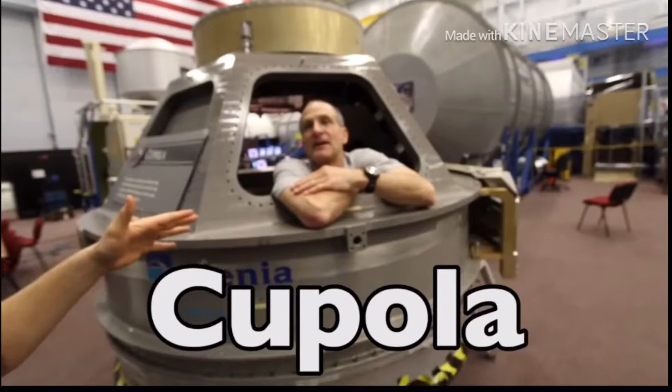Now, a lot of the pictures you see from the International Space Station come from the cupola on the inside here, right? So the cupola is on node 3, is that correct? Node 3. All right, so this is astronaut Don Pettit. You may know this guy. You've done all the city tracking. Yeah, I've done a lot of cities at night, and then the nighttime aurora and time-lapse sequences of Earth. Many of those that you see have been done in this module when I was at the helm of the camera.

He's the junk. Let me just say it that way. You're the junk when it comes to space photography, right? Can you say that? Say I'm the junk? No, I can't say that because I get too embarrassed. I'm gonna meet you on the other side, okay?

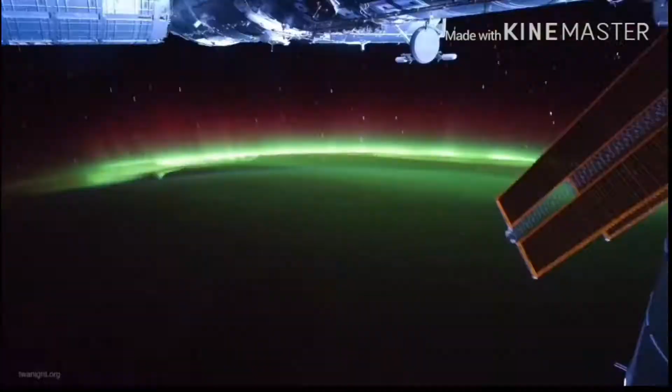So, seriously, he's the junk. Like all the really cool aurora stuff, Don's the guy that took it. Now this is a cover. Okay. So we call it a shutter, and it protects the windows from micrometeorites. The shutters are closed, the windows are protected, and it also thermally insulates the windows from the radiation environment of space. So can you shut these things from the outside? No, you can open and close them from the inside.

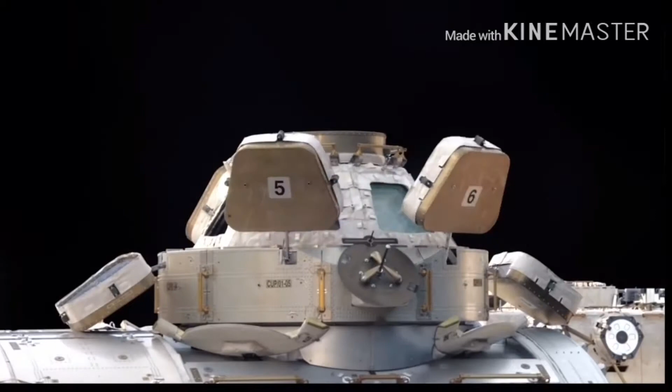Oh, okay, wait. On the inside, you're throwing a lever or something. Yeah, you're turning a knob. And it opens on the outside. On the outside. How do you do that and maintain a pressure seal between them? O-ring type seals, with a rotating shaft. All our hatch seals are O-ring type seals. Yeah, but how? My brain's up here. Let's go inside. We can see it. Watch your head. So you have a whole series of O-rings in here, and a shaft that you rotate.

So on the space station, how many of these would you have? 7, because we have 7 windows. What happens if you get a leak on that? Then you have a leak. You just have a leak, and you lose air. You would probably seal the whole cupola off, and there's probably a plan, I don't know off the top of my head, for replacing the mechanism.

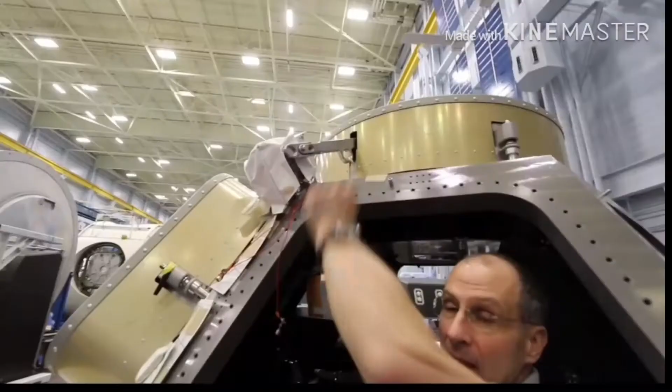Might require a spacewalk. So my question is, how can you operate a lid on the outside of the space station by manipulating something mechanical on the inside without losing air pressure? It's called real good engineering. Okay, you heard Don Pettit. He said it takes a really good engineer to design this sort of thing. I'm told the guy quit working on the space program and now owns his own motorcycle parts business.

Is Charlie here? Is he upstairs? You're doing an interview, right? I'm doing the interview. What is the name of this place? Pitbull Products. Are you Charlie? Yeah. Hey, I'm Destin.

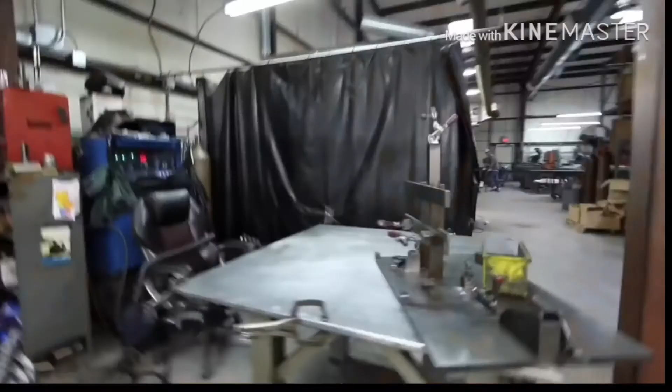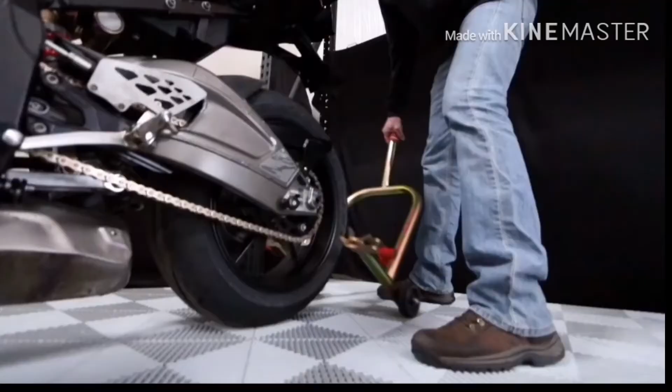This guy is Charlie Van Valkenburg. He went to Auburn University as an industrial engineer, and he's got well over a dozen patents. 20 years ago, he was the lead engineer over the cupola shutter design, but after the project finished, he went and built his own business. Now he's building this, a special stand that uses leverage to pick up a motorcycle so people can work on it. He's so humble that even the people that work with him had no idea what he did for the space station.

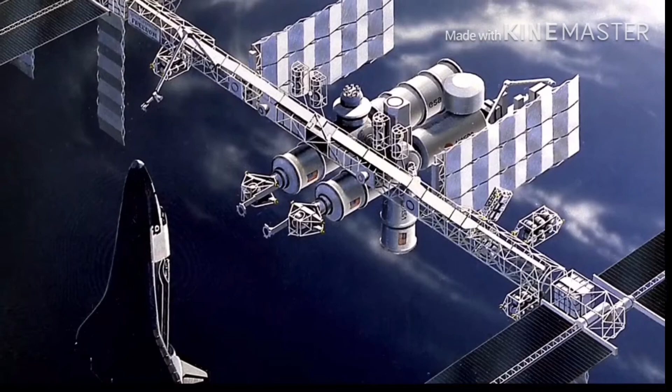When Charlie's team was working on this, they called it Space Station Freedom, which is a really cool name, by the way. This program morphed into the International Space Station program, and Charlie's drawing package was handed over to the Italian Space Agency so the Italians could fabricate it. Charlie, however, kept an entire drawing package because every good engineer knows you might have to go back and look at what you did. We talked about the handles, the bevel gears, the cartridge assembly. We found what might be the most critical part of the entire drawing package.

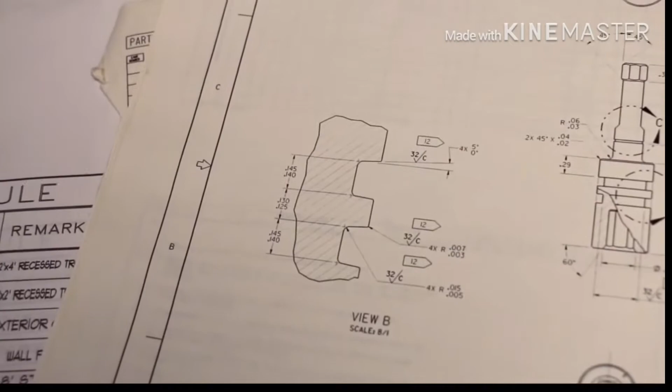This is the inner shaft, and you can see there are 2 grooves, held to within 0.002 of an inch. That's important because the interface between the inside of that groove and the outer wall compresses the O-ring. You have to control that because you're taking a circular O-ring and squishing it to an oval. Is that right, Charlie? That's correct. There's another detail to those O-ring grooves, right? Right, these are the dynamic grooves. Those 2 are the ones that actually are turning.

Did you hear what he just said? He said they're dynamic O-rings. That means there's a shaft running through it actually rubbing on the O-ring. So you've got the air that you're breathing as an astronaut, and it's being held back from the vacuum of space by 2 little bitty O-rings. That's incredible.